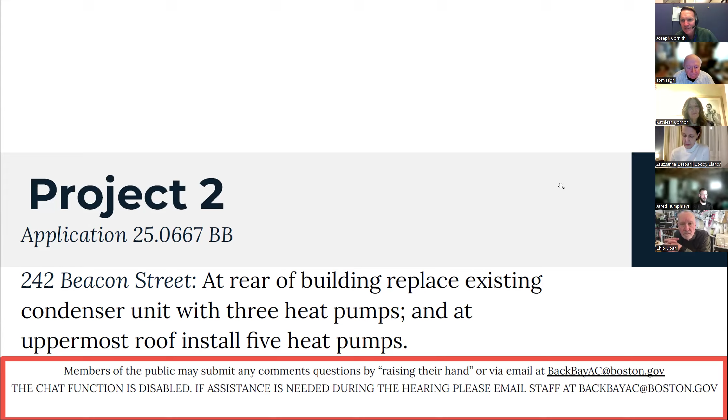If I could— Oh, sure. Let me just read my staff comments first, and then we'll move on to your presentation. So again, the scope of work is at the rear of the building: replace the existing condenser unit with 3 heat pumps, and at the uppermost roof, install 5 heat pumps. For my staff comment, staff notes that 242 Beacon Street is a 6-story brick row house built in 1880, designed by Sturgis and Brigham Architects. The proposed project is replacing existing HVAC equipment currently located at the rear of the building. Staff recommends approval with provisos, finding that the applicant has confirmed it is not possible to locate all of the heat pumps at the uppermost roof. Fencing to screen the ground unit should not exceed 6 feet in height, with final design details remanded to staff. So those are my recommendations, and I can stop sharing if you'd like to share your screen.

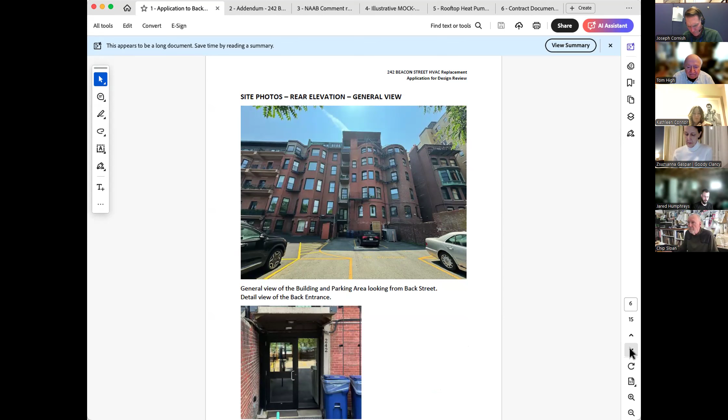The application, here's the existing chiller in its location. That's Jared, you can get an approximate read on the height of the unit. That's Annie Stefanelli, she's the property manager.

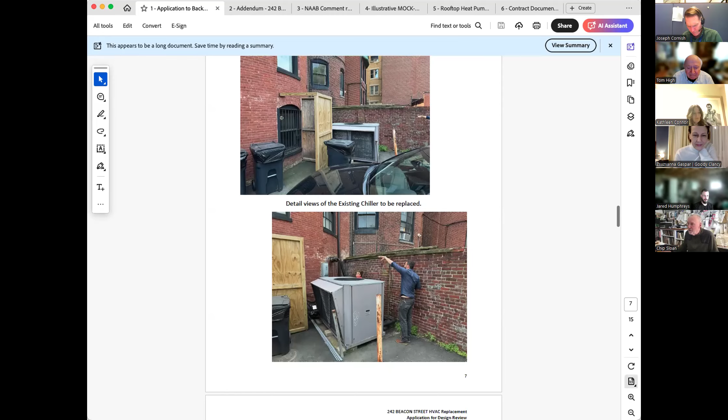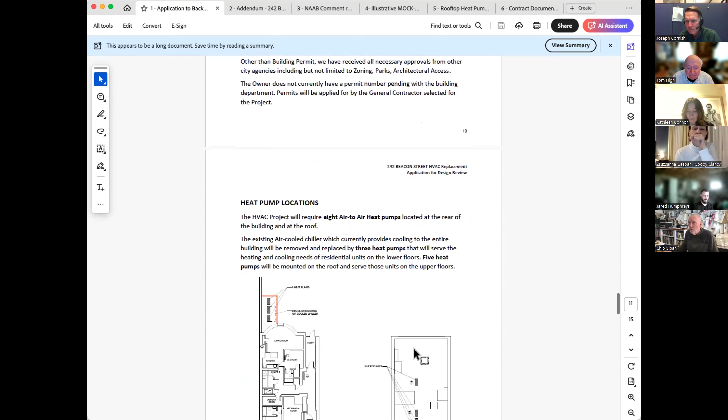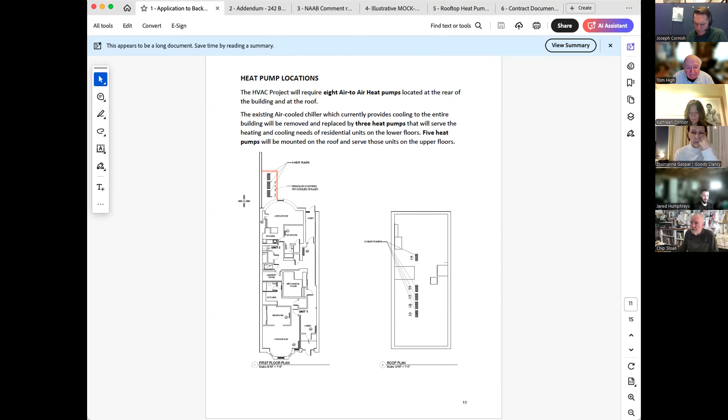You've seen the summary of the work. I'll go right to the heat pump locations. We've got 3 at grade at the back, and there was a comment from Joseph about screening, asking if it was possible to screen the units. The answer is yes, and in an addenda form we sent a little sketch. These are the type of units that are getting installed.

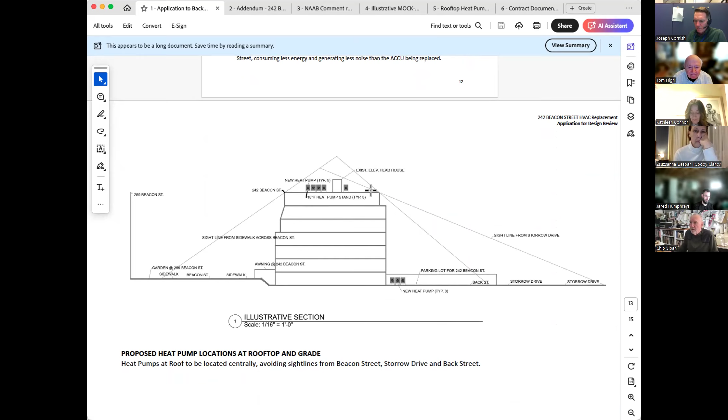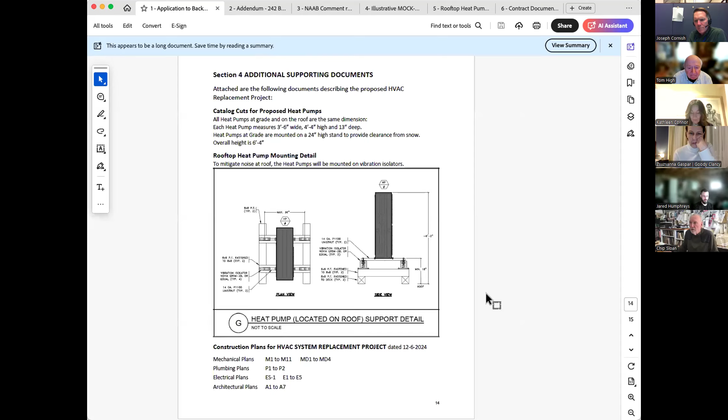This is a diagrammatic section through the building, illustrating how we're locating the units on the roof, keeping them away from the roof edges to avoid the view sheds from Beacon Street and from Back Street. In addition, the units on the roof are mounted on sound acoustic isolation mounts.

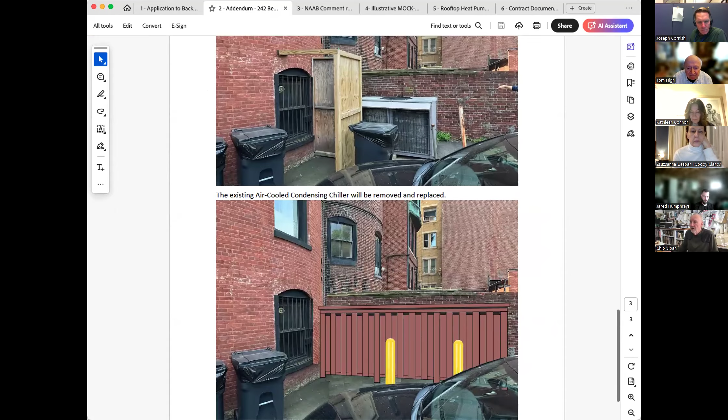Let's go to the addendum. So the first comment we received was about screening. We provided you with a sketch, a board-on-board design with a few bollards.

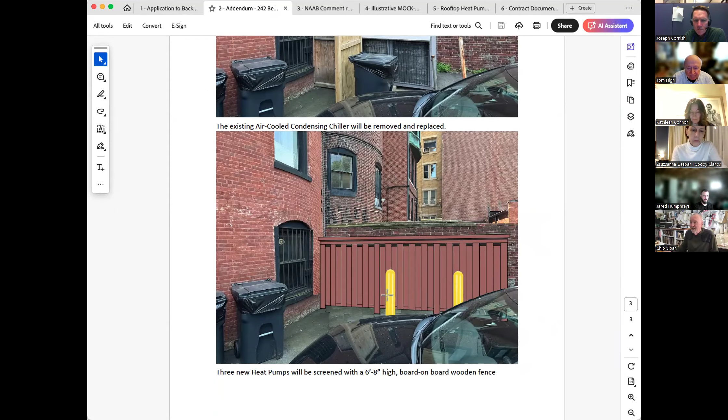Some comments came back from the neighborhood committee. They wanted to see what it looked like from the side, so I have a little sketch of that. And they didn't like yellow. So in our proposed revisions to the fence, we've got green bollards now, dark green bollards.

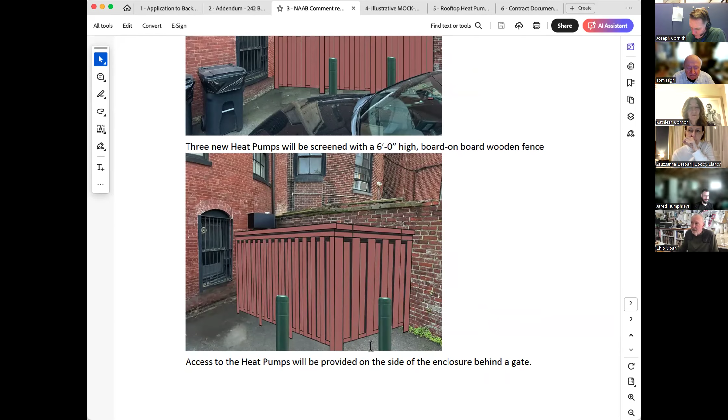This is a view from the end. We'll use the same board-on-board design and have a section that's a gate, allowing access for changing filters and access to the units. Oh, there's also some concern about the piping.

The piping will enter the building at grade or at the ceiling level of the ground floor, and the pipes will be right about here. So there's about 8 supply and return insulated pipes coming in right there, and we'll screen that as well.

Will those be below the level of the screen that you're building? They're a little bit higher. So the fence is about 6 feet, and the ceiling height, I think, is around 7 feet, and these pipes are coming in right around ceiling height. So you're going to get this little pop-up there.

How do you propose screening those? This is just a painted metal enclosure.

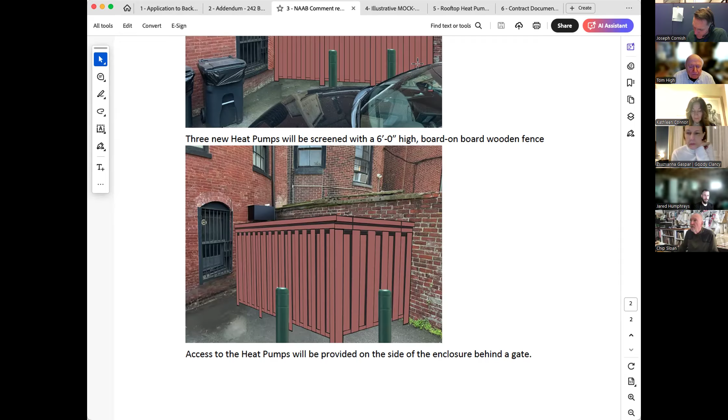Any ideas, Tom? No, I was just curious what he had in mind. I would think, as Joe is suggesting, that we would want the detail to be reviewed by Joe. Okay.

And you say you're lowering the fence to 6 feet because what you proposed originally was, I think, 6'8", and there was a comment about a zoning restriction on the height of a fence in this situation. Yeah, anything above 6 feet requires a Board of Appeal approval, so save yourself a lot of time and money for a few inches.

I did get the email about the mock-up for the roof. It's going to take a little while for the owner to do that. I understand that might mean we continue this hearing, this review, to the next hearing in order to do that.

If we were to build mock-ups, we would want to test out the locations closest to the front and back of the roof. It would take 2 mock-ups to really satisfy the committee about what you see and where you see it. They would have to be fairly substantial, because a good wind will take it off the roof unless it's securely mounted. So it's not the quickest thing to do, but if that's necessary, the owner will be ready to do that.

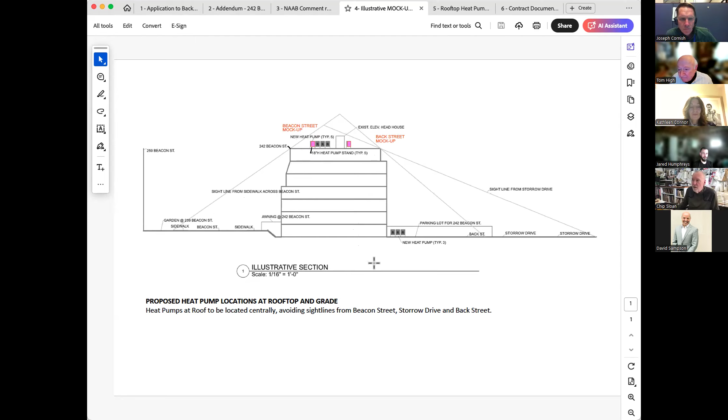Are these mock-ups routinely done? Yes. Okay, we could remand that to staff. We could absolutely approve this in principle and remand details to staff. That's a good idea, because from our perspective, the owner would like these in the right spot too.

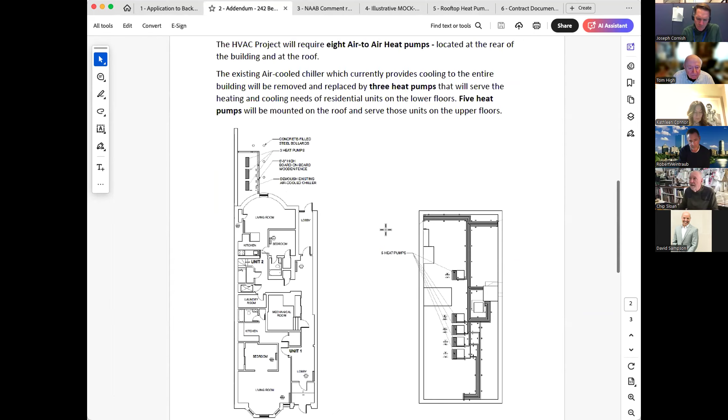If you look at our plan, there's a head house here, and there's some structures over there. We probably have quite a bit of flexibility in locating this, and I know the views aren't quite as simple as we see in one section. There could be views from this side, maybe even from adjacent properties, that are more important than we think, and it might suggest pushing it one way or the other.

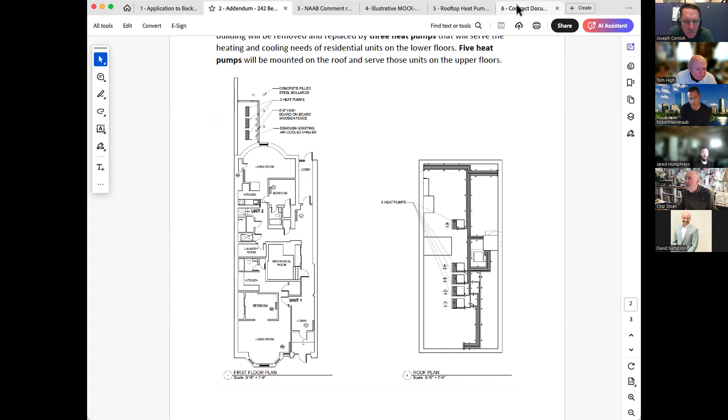Chip, how high are they going to be with the sound attenuation? They're a little over 6 feet. They're supposed to be 18 inches off the ground, and then the unit itself must be about 4 or 5 feet. Jared's on the line here — do you have the exact height on that? No, I think you're right, Chip, I think they'd end up about 6 feet tall. Sometimes there are snow guards or other things that have to be added to the top.

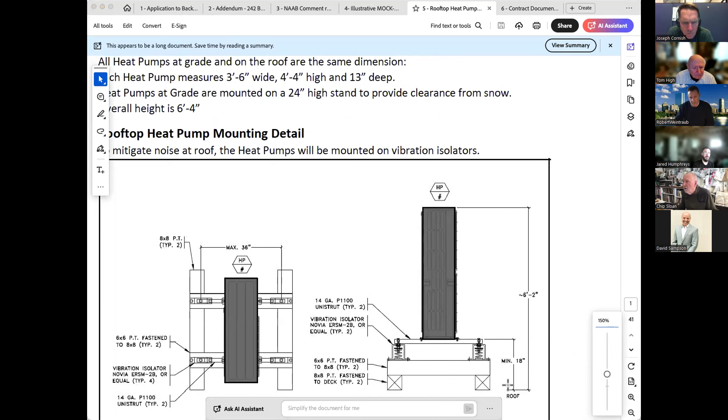Do you anticipate that? No, not on these particular units. Okay, yeah, so here's the ones up on the roof — it ends up being about 6'2". So a 6-foot fence does a pretty good job of hiding that, but you would see that hood for the piping peeking up. I don't think that would be objectionable. The isolation mounts are pretty much the same as the stand that's required — the stand's required at grade because snow builds up and they don't want the unit getting too close to the snow.

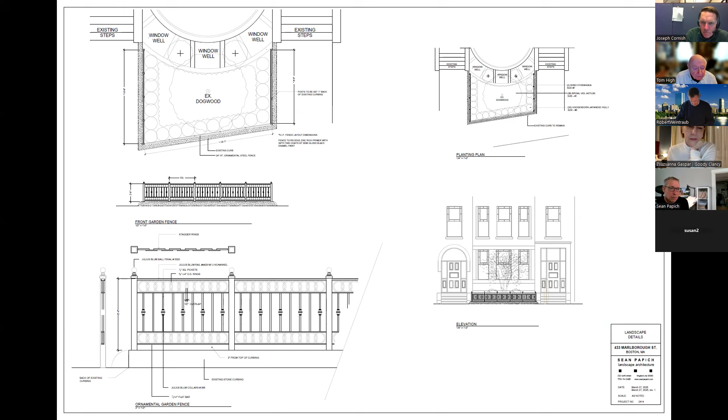Tom, is your motion going to talk about drilling the posts into the curb? Yes, I am going to propose that, as Joe recommends, the fence be mounted on the curb. Okay, excellent.

All right, Kathy, I think we're ready for public comment. Yes, I apologize, I'm at work and had something to tend to.

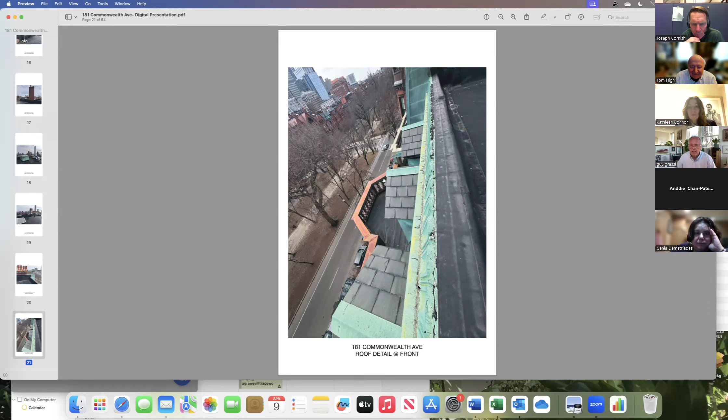Just some of the detail of the front—all of this is going to get a lot of work, replacement and repair. There's an interesting copper cornice here with an interesting detail, and a slight curb on the front which helps hide anything we're doing. This is just the condition at the rear—what they had to go through to get air to their chimneys.

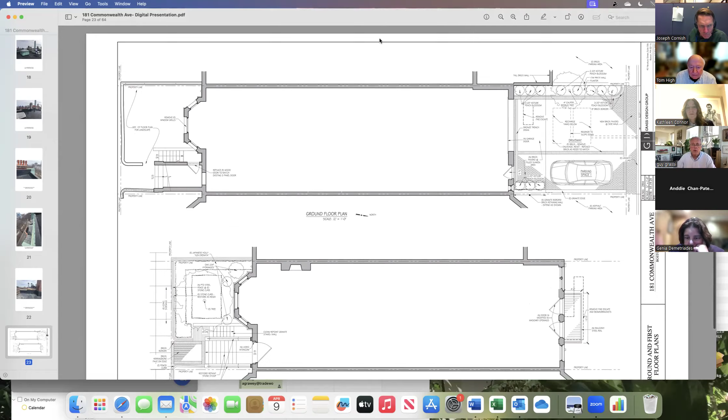We would do a herringbone brick pattern with a border in the front. And the border would be brick also? Yeah, all of it's brick. Good. And then at the ground floor, just to show you that a little better.

We'll brick pave the sidewalk, slope this driveway down to a trench drain, and then enter the building directly, so there won't be any step or retaining wall. Again, the hope is to align it with this one. Then we have room to create a plant bed along this edge, at the sloping grade, with a brick curb that wraps around, bordered with brick, and a running bond brick pattern in the center. It's simple, and we also have an opportunity to get a few more plants in this corner, so we'd like to do that.

Going up in the front, we've seen the front yard. We would like to build a small balcony here that replaces the fire escape, in the same location, and convert these windows to doors. It's no deeper than the fire escape, in fact slightly less. Looking at the plans, it looked like you had all these at about 4.5 feet deep. Yeah, I think it's actually 4'4". So it's quite diminutive.

This is the second floor. Because of the fenestration, we'd like to run this deck to this edge, and it is slightly larger than the footprint of the fire escape itself, but I want to capture this window and make it symmetrical on both sides. So this one's a little wider, but it's the same. This one's 4'9" that comes out. Could you reduce that down to 4'6", you think? Yeah, it's not a problem.

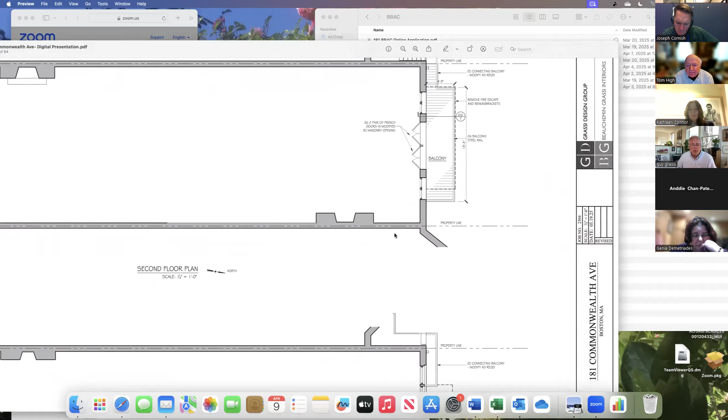And then these are French windows, in-swing French windows currently, and we would just make these two pairs new that go down to the floor. They're already pretty tall, and there's no changes to the front on this level. There's fire balconies here that would stay, and these fire balconies would stay. This one would now connect to this window rather than to this fire escape, and then no balcony on that level.

And then this is the 5th floor plan. So you see the deck here. This is the balustrade, and there's that gap between the railing and the balustrade, and then the decking on top of that, and then the center door. And then the back is again a small balcony that's 4'4" off the back, just capturing this one door.

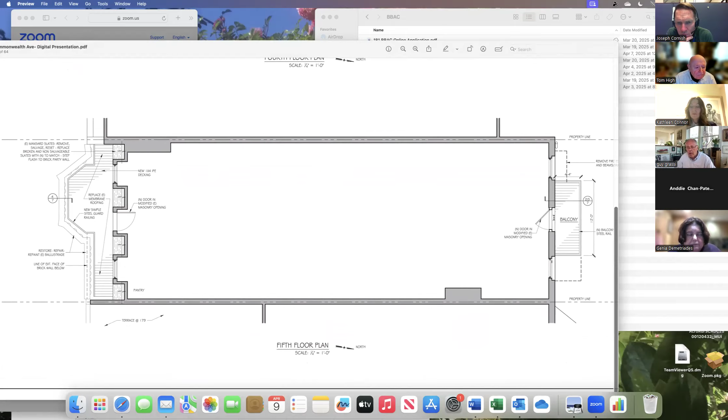Whoops, there's the roof plan. So we've got the roof deck brought to the inside edges of the chimneys, front and back. It's been mocked up, you can't see it from any place. I can't even see it from the far side of Commonwealth Avenue, which is kind of unusual. But because the roof slopes from front to rear, you can't see it from the rear as well. There's a skylight here, we've also mocked that up, and that's not visible, and the heat pumps are not visible.

But this roof, the bulkhead, or the head house we're proposing, is in fact visible from the center of the mall to the east of the building. There's sort of an area where, because our neighbor's building is lower, you can see over it, and you can see it. And I'll show you some other photos of what's visible and what's not. There's a low penthouse here for the elevator, which is not visible from any place, and it's only slightly higher than the parapet itself that's there.

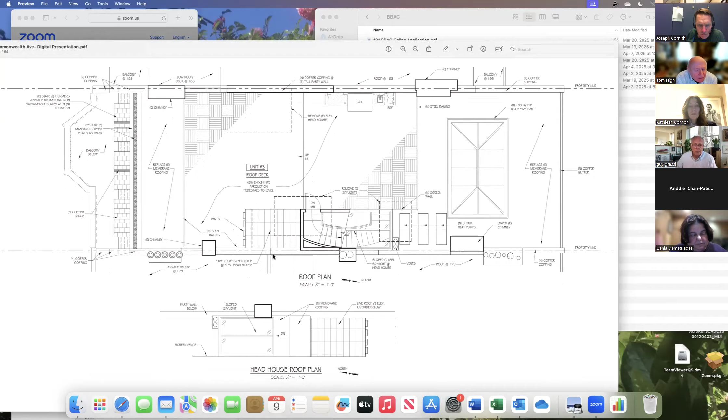Yeah, so that's the whole thing. I took a look at it from the middle of the mall, because I think that's the fair place to look at it, not from the far side. And it is really quite visible from the middle of the mall, much more so than the existing one. Going to a hatch would probably be an extreme solution, but there should be some way—you're very creative, I'm sure you can find some way of reducing or eliminating that visibility.

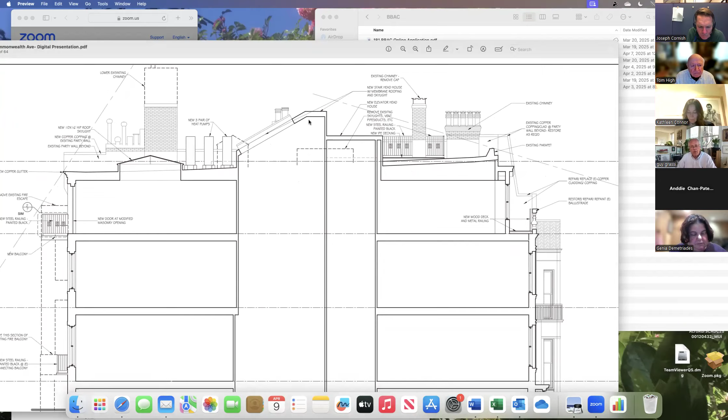Yes, I probably can. We would have to come up with some way to cross slope the roof so that it slopes towards the east, and lower the height of that wall, the party wall extension. We can mock that up and work with Joe on that if that's the best way to go about it, but this is a section through it. So I think we can come up with a solution so that you can get a door that meets at least 6'8", and then taper the roof on the other side of the door. So I think there's a way to do that.

The front and rear - oh, these are the front elevations. This is showing the existing condition and the proposed. It shows the old head house that's here, and then that's gone, and the new one, and you can see it is smaller than what's there.

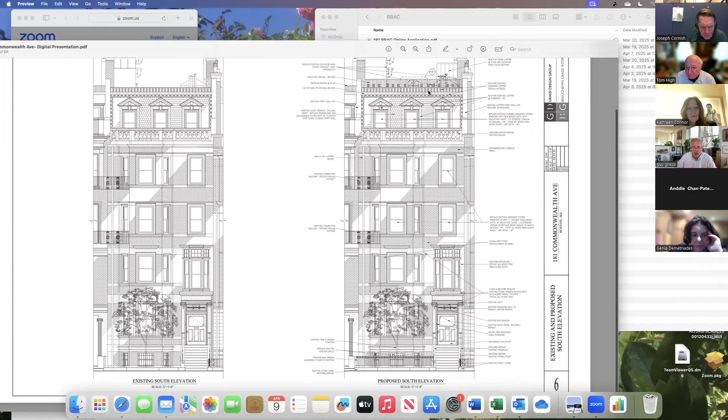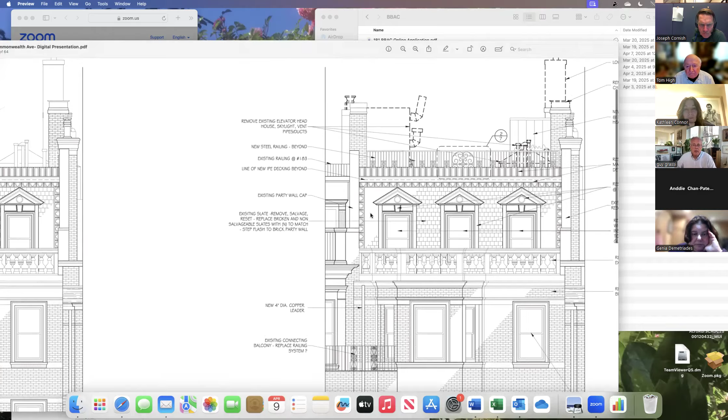The railing system and the design for the railing system actually comes from the grill over the front door, which is a similar design with this sort of circular pattern with scrolls in it, and then some little scroll work in the railing. It's delicate, but I think it's nice to match. We did a similar detail in the front railing, a ring detail that exists in that grill. So again, it's simple and clean, but has some relationship to the original grill. And then these are the fire balconies that remain on the front. Other than that, it's just replacement of windows and restoration of the stonework and the brick and all of that business. And then the rear elevation.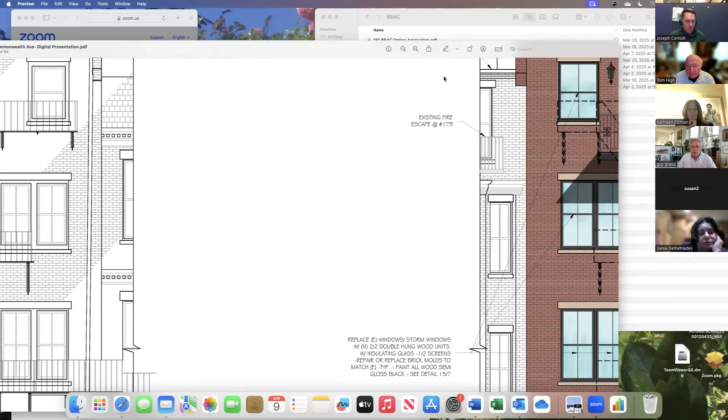I'll zoom in on this so it's a little more clear. So working our way down from the top, you see the heat pumps beyond, and this is that head house sloping down, and the existing head house going away. This is the reduction of that chimney and the skylight. None of this is visible, just that from the front.

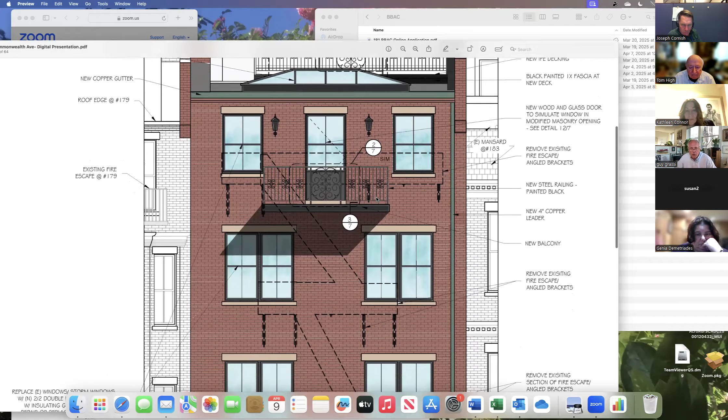This is the little balcony on the fifth floor, and again, that similar sort of detail that's in the transom. We're replacing all of the windows. These are the in-swing French windows. This is the same muntin pattern that exists, so we're replicating that and then aligning the glass and then doing panels below that.

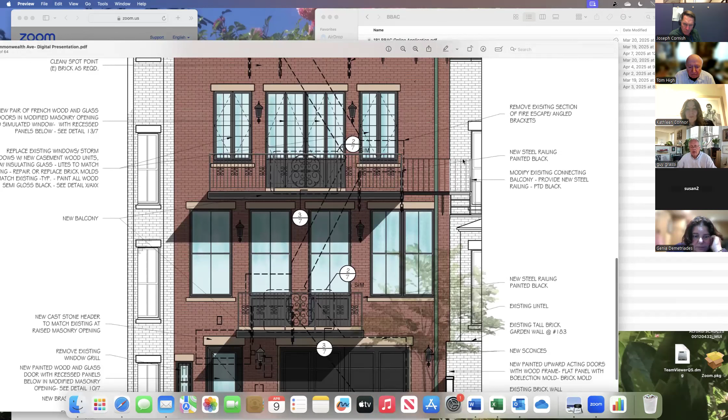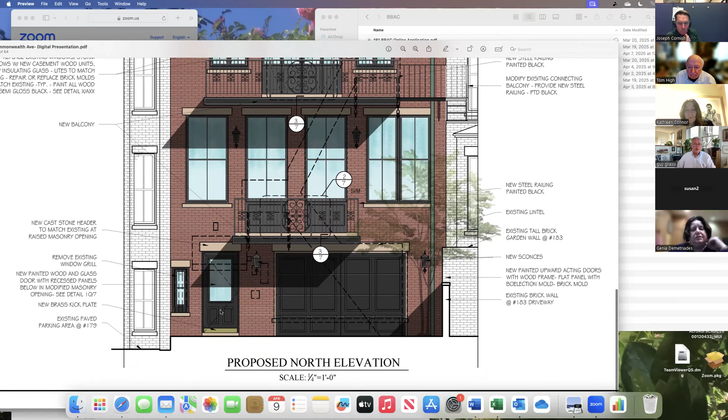And then this is that balcony on the second floor, and then the first floor balcony, again, is smaller. What we've done is run this fire balcony to the mullion here, so they have access to that window. And then this fire balcony has access to the deck and then allows them to go in from there. The rear garage door is a raised panel design, a little more formal than we normally would do, but this is a classical revival design of the alterations and additions, so we thought that was appropriate. Again, we kept the same height of the lintel and the same width of the jambs and just dropped the sills to create the garage door, and then replaced the rear door and removed all the junk that's back there.

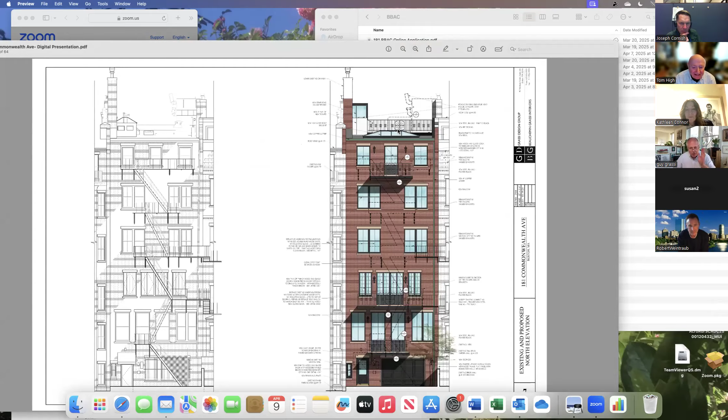And then these are some of the details: the windows, the grill work, and the railing and all that. This is the design for the railing system that goes inside the balustrade, just a very simple vertical picket, as simple as we can make it. And then the details on all the other stuff: door hardware, this is the intercom, it's a Siedle system, and then lighting and skylights and all that stuff. And then this is just the restoration.

So here is the mock-up photo, and this is the place where you can see it. It's more visible than I would have guessed, but it is what it is. So I think if I can just cross slope that, it'll help minimize it, reduce the size of that wall and make it a whole lot less visible.

For what it's worth, from other places you can't see it. As you start to get towards the building, it goes away, and here it's gone, of course. And then from this side, you don't see it. You do start to see the old one from there - you can see the vent pipes that come out of it and some of that business. You don't see it from any place else. And at the back, these are the mock-up photos, so you don't see anything from any of these areas. This is the mock-up of all the components.

This is the beginning of that fence, and right here you can start to see through the trees that existing head house. There's the snorkel that comes out of that penthouse, and from the center of the mall you can see the roof of that penthouse. That's the greenhouse, the sloping glass on top, and that's the vent that comes out just above the parapet line, so it is visible here. It is further back from the far side sidewalk, and it becomes even more visible. So anyway, that's the justification for being able to put up a slightly visible head house. And that's it.

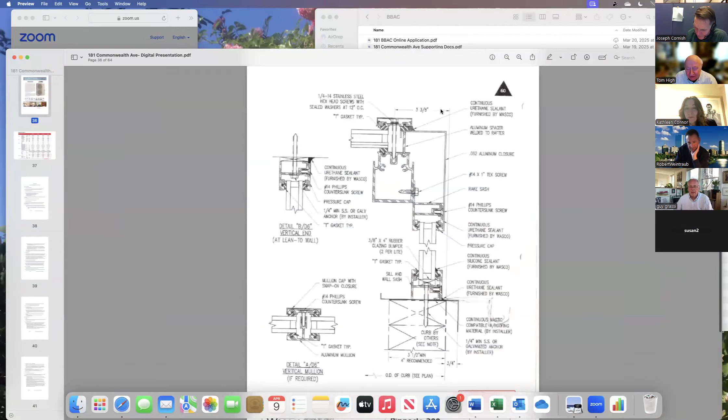Guy is used to me always arguing about rear facades, and in this case this is an absolutely altered rear facade from basement to roof. So I think what Guy is proposing seems to be appropriate. What happened was in 1927 they just brought the whole rear of the building back so it was flush with the one next door. I do think you want to reduce the size of the penthouse, and can work with Joe on that.

Under normal circumstances, those are balconies a lot bigger than Juliet balconies, you could fit the whole Capulet family on there. But we have approved those in certain circumstances. In this case there's no bay in the back, and that's usually where we've denied balconies in the back because they interfered with original bays. In this case there isn't one. The fenestration is unusual, and on the third floor where the large balcony is going to be, it seems to call for a balcony with those French windows. So as long as they stay within what we've approved in the past, which is 4.5 feet in depth, it seems to me that would work.

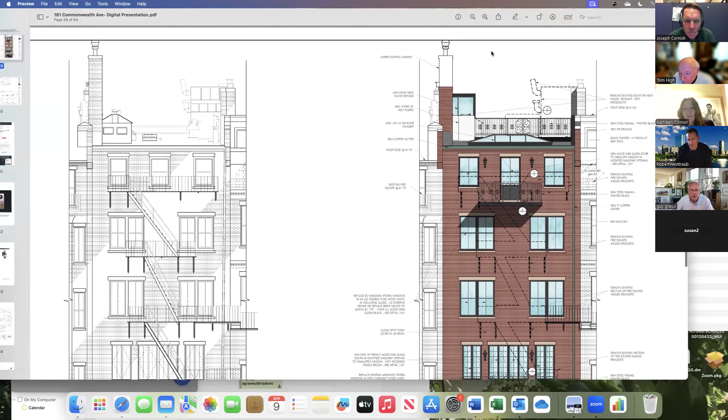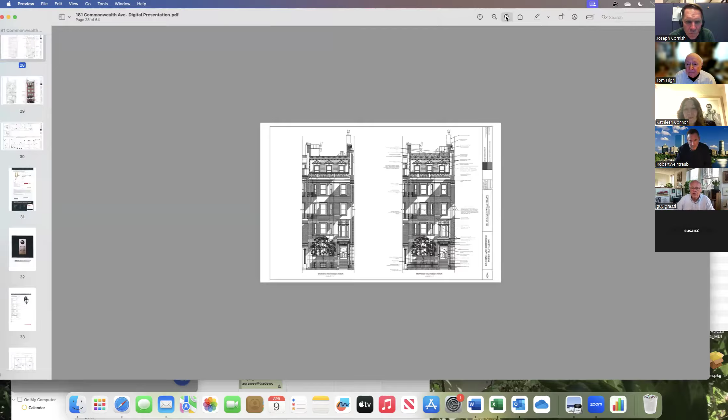My only question is, where did you get the ironwork design? I can probably show it to you in the photo. I don't know what happened on that, but there's a really interesting transom over the front door that has our drawing of it, though it's not as good as what's actually there. It's a circular motif with these sort of C scrolls that come out of it, and then a whole bunch of little rings that go down the middle. I can show you a photo of it if you want.

I think we have it. Do you think it's original? Yeah, well this was altered here. I have a feeling this might have been altered also at the same time, sort of 1911 — that seems to be about when that might have been done. It could have been done then, or part of the 1927 remodel. Yeah, I mean there were extensive alterations. Yeah, I don't know if you can see it here.

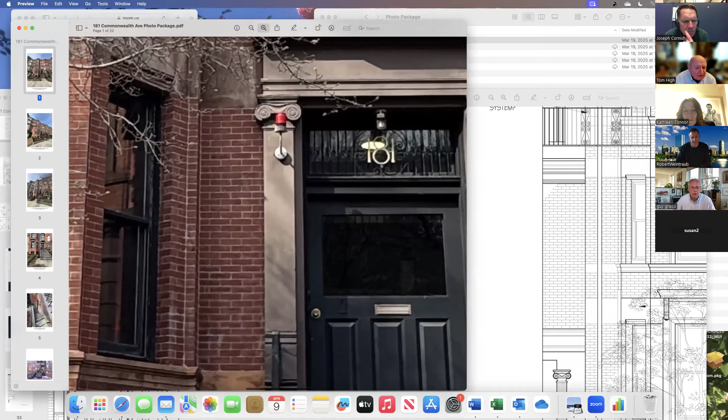It has the 181 built into it, which is kind of fun, but you can just start to see it — there are little rings in here, and then this circular motif with the scrolls that meet on the four quadrants. I thought it was a fun detail, so we picked it up in the detail of the railings.

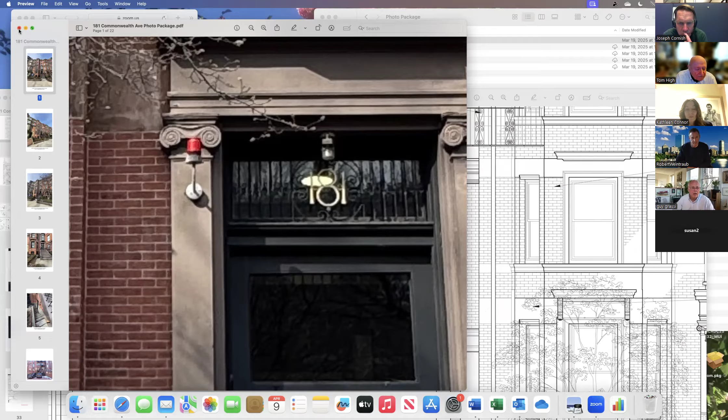Who's the developer on this? It's a company called MDM Development — it's a fellow named Matt Marshall. He's also doing 291 Beacon Street that you folks saw a couple months ago.

Any other questions, commissioners? Okay, then shall we go to public? Yeah, Guy, if you would stop sharing, I'll just bring up our script.